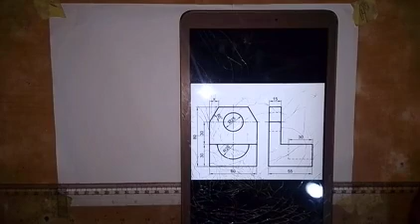We are going to be putting this part together to obtain the isometric view of these given orthographic views, and these views are given in first angle projection. As we have, this is the front elevation and this is the left end elevation. So we are going to put this part together to obtain the isometric view of this object.

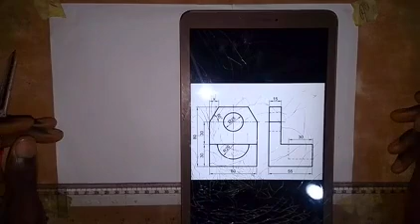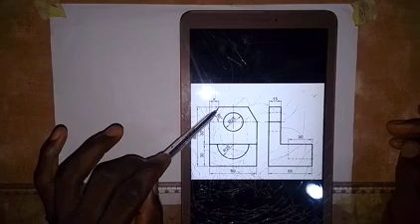But let's talk about dimensions here on the front elevation and also on the left end elevation. So looking at the front elevation, we have distance from here to here to be 60 millimeters, and then distance from this point to this line here is 30 millimeters, and then distance from here to the center of this circle is 30 millimeters. Diameter of this circle is 25, and then this line is inclined at an angle of 60 degrees to the horizontal.

We have distance from here to this point to be 80 millimeters. The thickness here on the end elevation is 15, and then distance from here to here is 30, and from here to here is 55. The radius of this semicircle is 20.

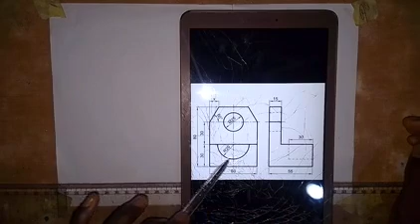So we are going to put this part together to obtain the isometric view of this object. So let's start and see how it goes.

The first thing that I'm going to do is to draw this L shape. Let's take this point as the lowest point. So that is what we are going to do. The first thing to do is to draw a short horizontal line, as we have it here like this, to place the lowest point.

Then with a 30 degree set square, I'm going to draw a line in this direction, and then we are going to draw a vertical line at this point. So this point here is the lowest point, so I'll just call it lowest point X here.

So let's indicate that. We are going to take a measurement of 30 millimeters. From this point X here up, we take 30 millimeters. So this is 30 millimeters, and then along this side we are going to take a measurement of 55 millimeters. So from this point we take 55. So this is 55 millimeters.

So at this point here, we draw a vertical line. The height of this vertical line is 80 millimeters. So take a measurement of 80 millimeters. So this is 80 millimeters here.

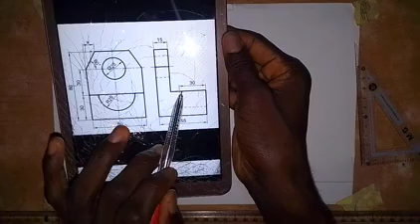So we have the shape that we are given in the end elevation, which is this shape. So we have it here. The other things we are going to put there.

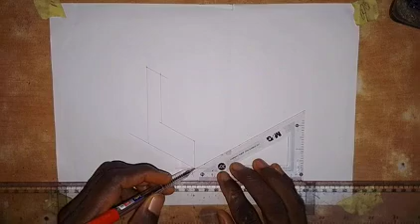The next thing that we are going to do is this: we take our set square, set at this point, and we draw a line in this direction, and then coming to this point, we draw a line in this direction.

Then we come to this point here, then draw a line in this direction. Then you come up here, so draw a line in this direction, and then we come to this point, we draw a line in this direction. All right, so the next thing that we are going to do, the length on this side is 60 millimeters.

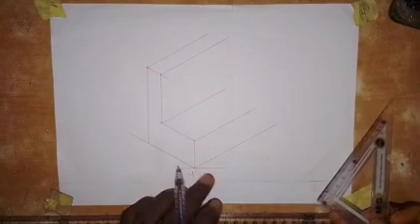So we take a measurement of 60 millimeters from this point X here. We take 60 millimeters, this is 60. So let's get the midpoint, we need it, so we are still coming to that. Then, having taken that 60, you come to this point and draw a vertical line.

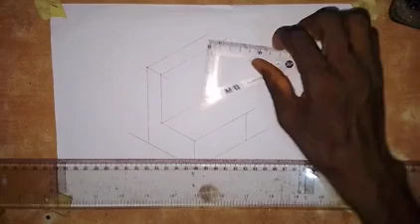Touch this line. Then from this point, turn the set square like this, and then draw to this point. Let it touch this point.

You come and set it vertical like this. Draw a vertical line to touch this line, and then set the set square like this, and draw a line to touch this line here.

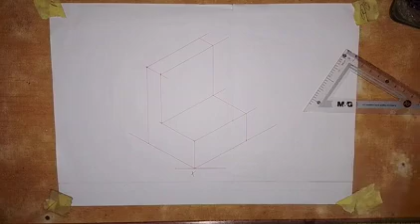All right, so we have that. Let's work on this part first. So what we have here on this part, I want us to get this shape out.

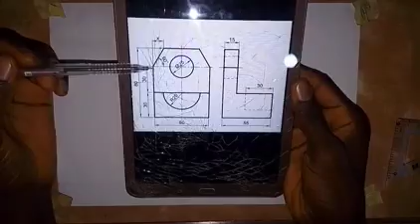So if you look at what we have here, the total is 80, and from this point down is 60, that is 30 plus 30. So we have 60, but we are told that the angle at which this line is inclined to the horizontal is 60 degrees.

So distance from here to here is not given. Normally that distance is supposed to be given, so since it is not given, let's see how we can work that out.

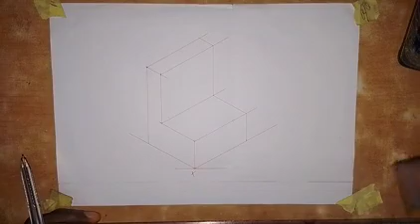But first of all, we need to take a measurement of 60. So from this point, take 60 millimeters up. This is 60 millimeters here. So we draw a line from this point.

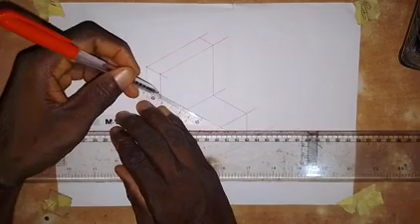Okay, so let's transfer it. I just mark it here like this.

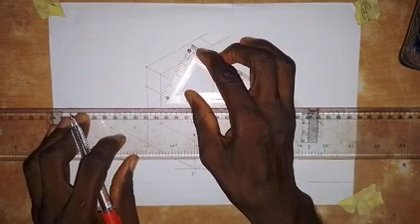So the next thing we are going to do, since that distance is not given, but we are told that it is inclined at an angle of 60, we set our 60 degrees set square, and set it like this.

I'm looking at that distance, it will be too much.

So that distance I will take as 10, 10 millimeters. That is this x that we have here. I will take it as 10. So for most of the questions that I've seen like this, they usually give the distance, so I will take it as 10.

So that is 10. I will also take 10 millimeters here. So this is 10 millimeters. I'm going to transfer this distance here. Coming here, I will transfer it here like this.

Okay, so the next thing I'm going to do is join this point together. I'll make it a thick line at once. This is a non-isometric line, so you just need to draw it straight. Also here, I will join this together.

So it's only this part that we are going to see, so let's leave it for now. We are done with that part.

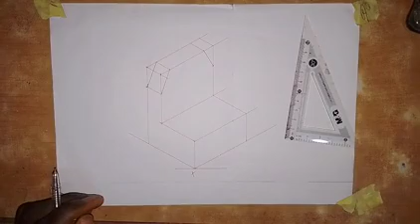So then we have a circle here. We are going to create an isometric circle on this face, and we have that the distance of the center line here from here is 30, so we are taking a measurement of 30 millimeters from this point.

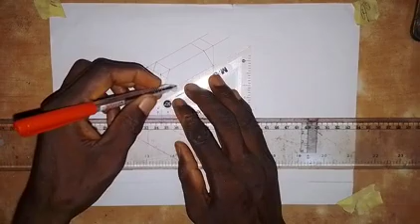So this is actually 30 millimeters. All I have to do is draw a center line here. Okay, so we have the center line. Then we also have to draw a vertical center line. This is 60, so divide this 60 by 2, that is 30. So draw a vertical center line on this face.

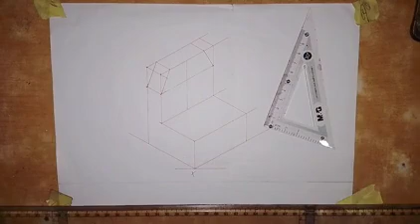So we have this, and the diameter of the circle is 25, so the radius is 12.5. What I will do is just make it 13, because to get that 12.5 may be somehow uneasy.

So I will make it 13 to this side, and then take 13 millimeters to this side. Then take 13 millimeters down, so this is 13 millimeters down. Then we take 13 millimeters up, so this is 13 millimeters up. So we create an isometric square on this face.

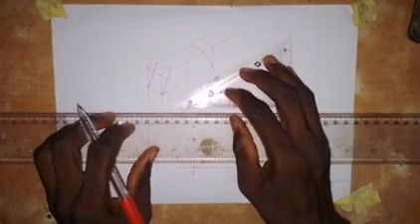Create an isometric square on this face. Alright, so we have the isometric square.

So join these longest diagonals together, the longest corners, join them together. So this point here, join it together with this point like this. And then you also join this same point together with this point. So join this together.

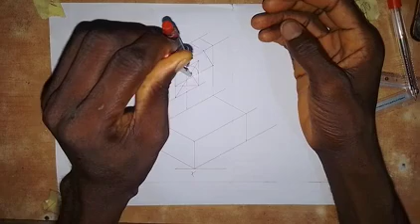Alright, so we are making use of this center and this center to draw the isometric circle. So we put the pinpoint here at this point, then we draw like this. If you are yet to know how to draw an isometric circle, we have videos for how to draw an isometric circle on this channel. Search for it and learn how to draw isometric circles with ease.

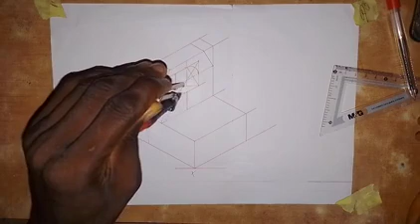So the radius is small, so that's why I'm being careful. Put the pinpoint here and extend to this point. Just have it like this, and then we put it at this point, and we draw like this. Alright, so we have the isometric circle here.

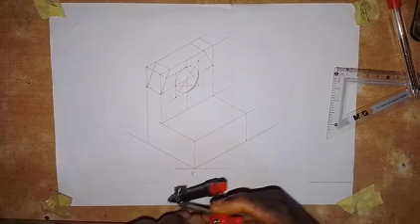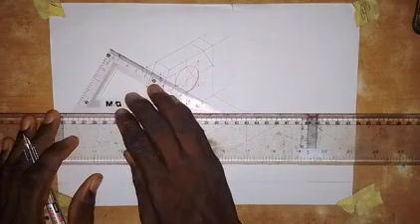One thing about this isometric circle is it's a bit wide, so you'll be able to see a little part of it at the back. So what we have to do for that is come to this point here. Just take any distance, draw this line like this, come to this point on the circle, draw, and then draw like this. So the wideness is the thickness here.

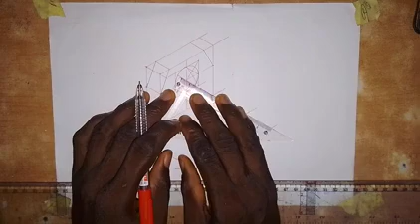Thickness here is 15, so let's see. We can't get 15 here, but here I can get 15 on this line, so on this line this is 15 millimeters. On here also, I don't have 15, but what I'm going to do is, we have this point, so this point and this point here, we are going to use the French curve to produce that curve.

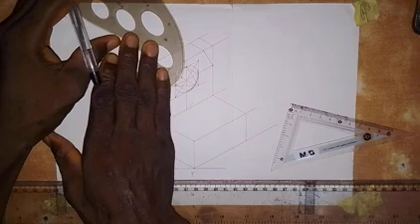And it goes like this. So just set your French curve along the point, set it very well, and then we just draw. So the curve is like this. That's the other part of the hole at the back, so this is how it will show. Alright, I believe this is clear to you.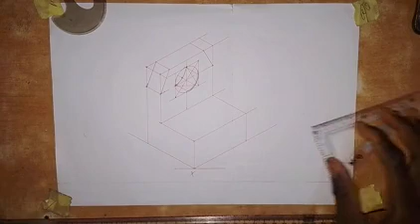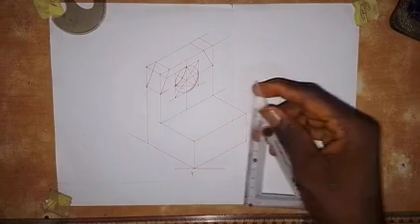Okay, so now the next thing that we are going to do, at the front here we also have half of a circle, that is a semicircle. We have it at the front here, and it goes to the back to a distance of 30 from here to here. So what we are going to do is get the midpoint first, so we get the midpoint, this is the midpoint, so here we have the midpoint.

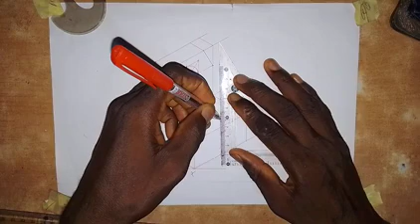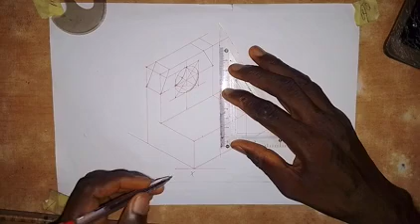Alright, so then we need to extend this. So we extend this. The radius of this semicircle is 20, so we are going to create a square of length 40. We take 20 to this side and 20 to this side, then on this line we take 20 millimeters down and 20 millimeters up.

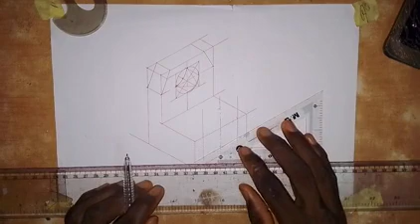I usually create an isometric square, so we turn this to an isometric square. Alright, and then we draw this line. Alright, so we connect this together. So we are just producing half of it, so just join this point together with this point. So join this together.

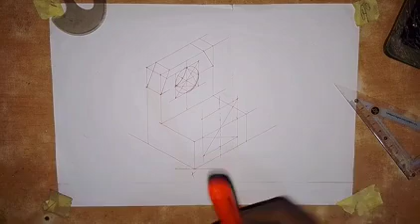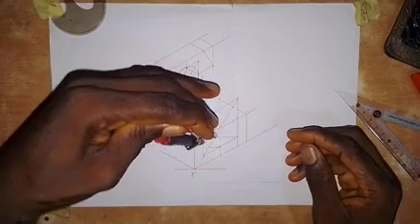Alright, so then the next thing that I'm going to do is take my compass, put the pinpoint here. We are producing half of it, so it's only this point that we are using, this point and this point here. So we draw this half part, so we have it like this, and then we put it at this point, extend it here, and then we go like this.

Alright, so we have this. I need to do something here.

Okay, that's true. All right, so this is what we have here.

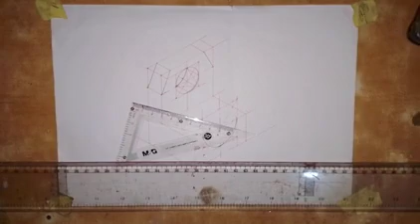So this eye is to be at the front, so at the back we are going to draw a line from this point. From this point here, we draw a line backward. So we draw a line here, and then we come to this point, and we also draw the line like this.

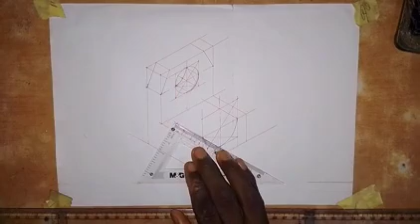So we take a measurement of 30 from here. So the length is 30, measure 30. Okay, so let's transfer it to the other side, like this.

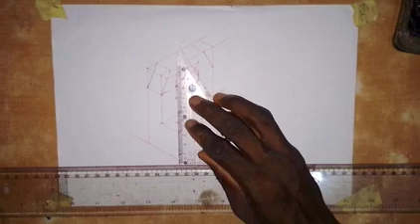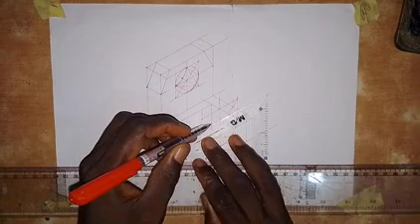All right, so then I will take it down, and draw a vertical line here. At this point I will draw a vertical line. I'm going to take a measurement of 20 millimeters, which is the radius. So take 20 millimeters down, transfer it to this side, and then partially join this together like this.

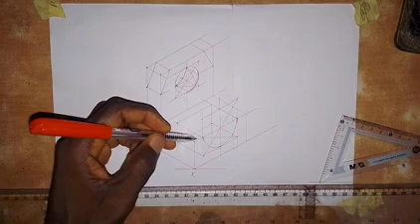The next thing I'm going to do is also do the same thing here, just join this together. So now we need to create the curve here - not the whole curve as we have it, but just here. So how can I do that?

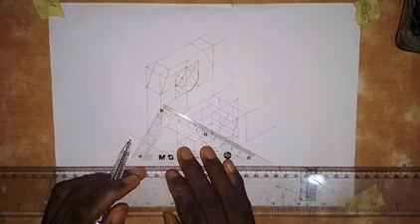I'm going to use my French curve to do that, but this is what I'm going to do. From this point here I will draw a line, take the line, and then here I'll also draw a line, just move away and be drawing the line. Here also I will draw a line - just look at the way I'm doing it to touch this line that we have down here, where we have that 20. So here also we draw, and then here we draw. So we already have this.

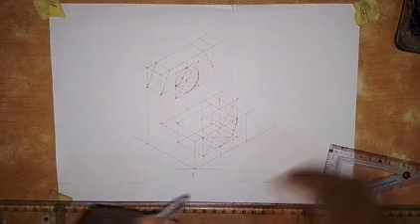So then what I'm going to do now is take a measurement from each of these points here on this curve that we have at the front here. So we take a measurement of 30 millimeters. So just come here - okay, at this point we have 30 millimeters.

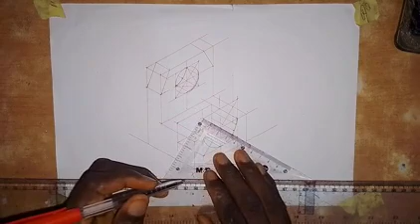All right, so I need to extend this line. I need to extend this line. So I will extend this line, and I will also extend this one. Then I will extend this too.

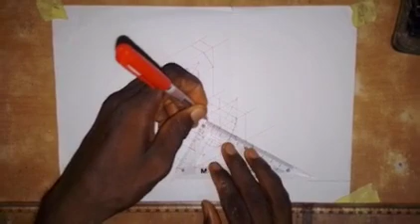All right, so then I will take 30 millimeters from this point, take 30 millimeters in - this is 30 millimeters, so we have that point. Also from here I will take 30, so this is 30 millimeters. Then come here, take 30 millimeters. Then here also, from this point I will take 30, so this is 30. So each of these points, we are going to use them to produce the curve.

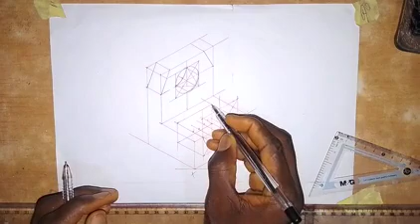Okay, and then everything will be joined to this point here. So I'm going to use the French curve to do that. I will set the French curve like this. Okay, so I can join these ones together. Then I can join this together. All right, so this is how the curve will be, down here - that's how we have it.

So what we have to do now is make this line. Okay, so let me thicken the edges. Having thickened the visible outlines and edges, so this is what we have worked as simple as I've done it here. All you have to do is practice. When you practice this, you become a master at it.